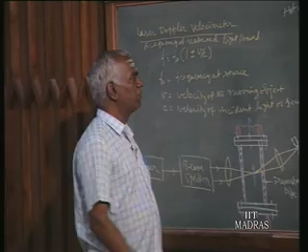Yesterday we saw the hot wire anemometers in 3 modes of operation. That is constant current mode of operation.

This is a hot wire anemometer where we have this wire here, of a few microns diameter. It is taken inside, with connections given inside. This wire is used to sense the flow.

We saw 3 modes of operation: constant current mode, constant temperature mode, and another with automatic adjustment and feedback control. This is what we saw yesterday.

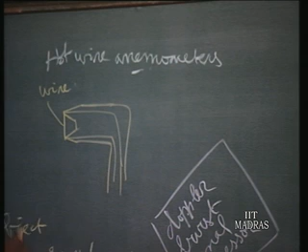In maintaining such hot wire anemometers, one is supposed to clean this wire periodically. Otherwise, the dust carried by the flue gas will get deposited, and we will find the heat transfer coefficient H affected.

We saw yesterday the equation I squared RW equals H into A into TW minus TG, the heat transfer equation. That factor H is affected if you allow dust to accumulate on the wire. So it should be cleaned periodically so that the calibration curve remains valid.

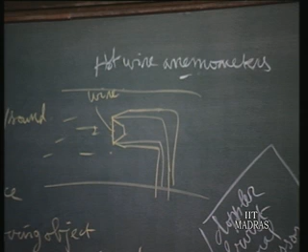We also saw the calibration curves. In cleaning it, since the wire is so thin and short in length, it may break. Also, the gas flow in the pipe may contain hard particles, and due to high velocity, when a hard particle hits the wire, it may also break.

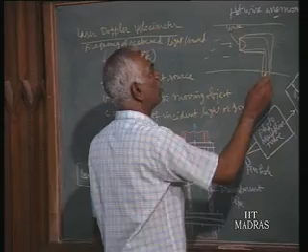So in order to avoid this problem, people nowadays use a hot film anemometer instead of a hot wire anemometer.

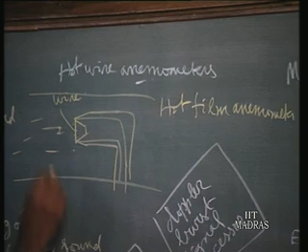Here they take a wedge type glass, made up of glass support. Instead of keeping a wire, they paste the wire material on both sides. This is a wedge type.

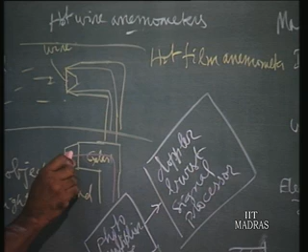They deposit the wire material on both sides of the wedge, then take a wire from the front surface, and from the back surface another wire is taken. So now it's a hot film anemometer - instead of wire, we are using a hot film, supported on the face of the glass support. This eliminates breakage, which is the advantage of the hot film anemometer over the hot wire anemometer.

So now we pass on to the next method, that is the laser Doppler velocimeter.

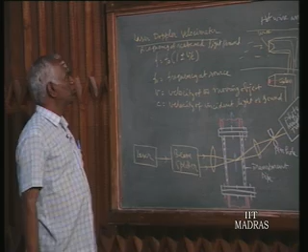Here one can use either sound or light. The principle is making use of the Doppler effect. The Doppler effect states that the scattered light from any moving body contains information about the velocity of the body, so the scattered frequency will be different from the source frequency. That is the Doppler effect - the scattered beam contains information of the velocity.

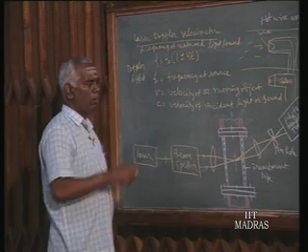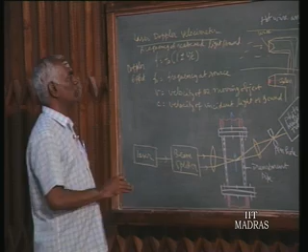This is expressed as an equation: the frequency of scattered light or sound, f, equals f0 times (1 plus or minus v by c), where f0 is the frequency at the source, v is the velocity of the moving object, and c is the velocity of the incident light or sound, whichever we use in a particular instrumentation.

We use plus when the object is moving towards the source - this is the source from where we send a beam. We use the other sign when the object is moving away from the source. For example, this Doppler effect is used for identifying racing cars.

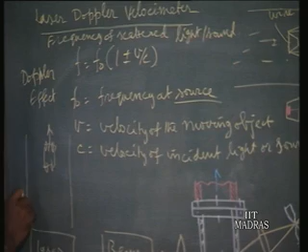Suppose a police officer is standing here, and he sends a light source or laser beam and collects it back. If the car is moving away, by collecting this reflected light or laser, he will find out the speed, whether it is more than the allowed speed on the road.

So the Doppler effect is used by traffic police officers to locate racing or overspeeding vehicles. The same principle applies here, because the moving vehicle's velocity information is obtained this way.

Similarly here, v is the velocity of the moving object. Now in any gas flow or fluid flow, that flow contains some foreign particles, and we assume that the foreign particle moves with the same velocity as the fluid. Under that situation, we send a laser beam through a beam splitter, splitting it into two, and with the help of a lens we converge it within the diameter of the pipe.

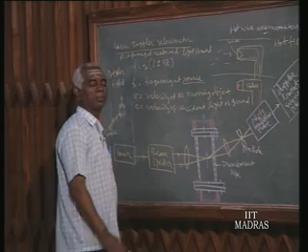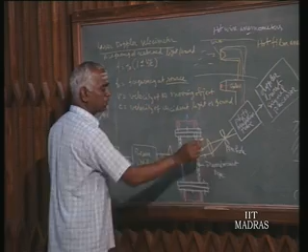Where it converges, there may be a particle flowing with the same velocity as the gas, so it scatters the light. This scattered light is collected by another objective lens, and through a pinhole we can control the intensity. Then it goes to the photomultiplier tube where the light is transduced into voltage. That voltage contains the information of the velocity of the object. Through an electronic circuit, according to this equation, you extract the information proportional to V, which is depicted as the velocity of the fluid.

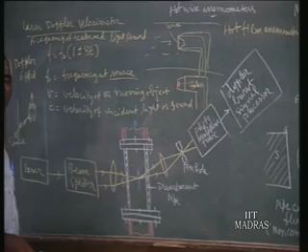That is the principle of this laser Doppler velocimeter. By focusing at different points, we can find the velocity of the fluid, then we plot that velocity profile, and the average velocity multiplied by the area gives the flow rate. That is how the laser Doppler velocimeter is made use of.

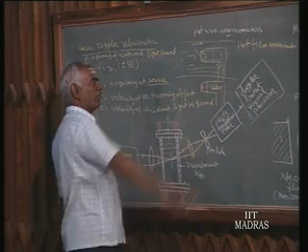It has one main difference. Now compare it with the pitot tube as well as the hot wire or hot film anemometer. There, the flow is obstructed - you have only less area available, since the total area minus the probe area is what remains. That is, the flow pattern is disturbed by inserting the pitot tube or hot wire anemometer. That is not there in the case of the laser Doppler velocimeter - it's undisturbed flow. Without disturbing the flow, we are making the measurements. That is the main advantage of this laser Doppler velocimeter.

In aeronautics laboratories, many places use this laser velocimeter to find out the velocity of air particles in a channel, in a conduit.

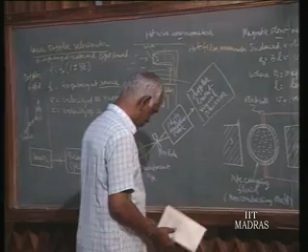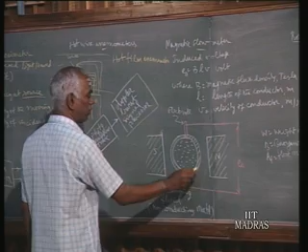Next we go to the magnetic flow meter. One such magnetic flow meter principle, the sketch is given here. This is a magnetic flow meter. It contains a pipe made up of non-conducting material, carrying the fluid. Here it can be slurries or liquid containing sediments also, because we don't have any obstructions. So slurry flow rate also can be measured using this. That is the main advantage of the magnetic flow meter.

So we have the non-conducting pipe carrying the liquid in the direction perpendicular to the board, and by two electrodes we pick up the voltage developed in this fluid, which is placed across the north pole and south pole of a permanent magnet. The magnetic lines flow in this direction - that is Faraday's principle. The magnetic lines are in one direction, the flow is perpendicular to the board, and the electrode direction is perpendicular to both. If we call this the y direction, the magnetic lines are the x direction, and the z direction is perpendicular to the board.

These represent the flow, the velocity of the conducting material. The diameter of this pipe represents the length of the conducting material. Each small strip can be considered as a strip, so it flows in this direction. The flowing direction is the z direction. Magnetic lines are in the x direction, and the voltage developed is in the y direction.

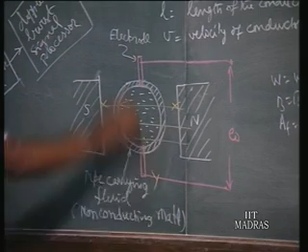So we have this equation: induced voltage EO, picked up at the electrodes, equals B into L into V, where B is the magnetic flux density in Tesla, L is the length of the conductor in meters, and V is the velocity of the conductor, that is the flowing speed, in meters per second. The problem here is it's not a conventional conductor wire, but the whole diameter is considered as the wire length, as the wire is in the form of a disk as it moves.

So the developed voltage is picked here, proportional to velocity, we have got output voltage. And the output voltage can be calibrated by sending known voltages, known velocities, and later on unknown velocities can be found out from this voltage developed between the electrodes.

Here in this case, when the liquid that flows is non-conductive, just like water, the amount of voltage developed is very, very small. If you use a DC amplifier to amplify this voltage, a drift problem will come. To avoid this, instead of a permanent magnet, they use an electromagnet of varying frequency. Then the voltage developed also will be at varying frequency, and that can be amplified suitably in an AC amplifier.

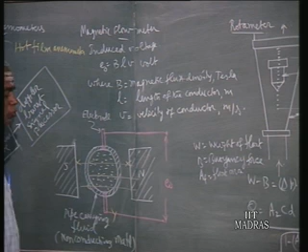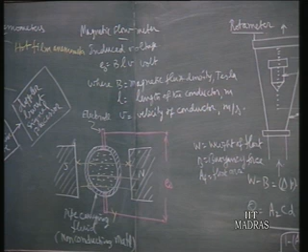Suppose it is a conductive material, just like liquid metals, then we don't require AC. DC voltage itself is sufficiently large. We can measure it by an ordinary DC voltmeter.

It is to be noted, since it is a non-conductive material, the electrode goes into the body and touches the liquid at the surface of the liquid. Then only the voltage can be picked up and it comes down. So this is the principle of the magnetic flow meter.

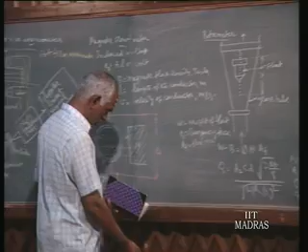Next we go to the rotameter. For small flow rates, rotameters are used, both for liquid and gas, but mainly people use it for liquid flows.

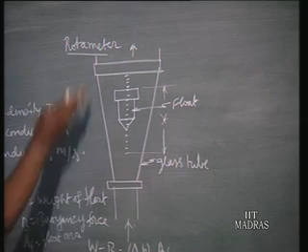The method of functioning is, due to flow, the float rises. When flow is there, it rises to different heights at different flow rates. Where it stops, a measurement is taken, that scale is written there, and that scale reading you can calibrate in terms of flow rate. This is the way it is made use of.

The principle of functioning is, assuming the float is at some height, let W be the weight of the float, and buoyancy force equal to the volume of the float times the specific weight of the liquid that flows, that is the buoyancy force. That is, weight minus buoyancy force is balanced by delta P, the pressure drop across the float, into AF, the projected area of the float, giving the net balancing force.

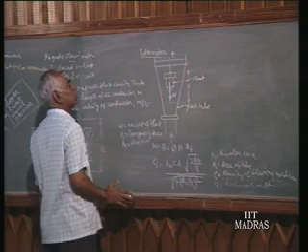The remaining weight is taken up by delta P times AF. That is the equation for equilibrium. Now you find for any given float or any liquid, W is constant, B is constant, AF is constant for any given float and given liquid. So when everything is constant, then delta P should be constant.

But at the same time, we find the equation for flow rate, Q, the flow rate through this rotameter, is given by A2, the annular space. CD is the coefficient of discharge.

Delta P is the pressure drop across the float. Rho is the mass density of the flowing medium. And A2 is the annular space. A1 is the pipe inlet area.

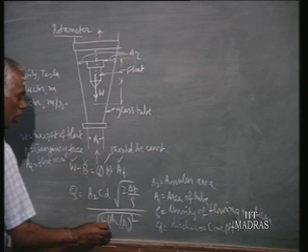So in this, if delta P is to be constant, then whenever Q varies, considering A2 by A1 too small, we can neglect it, and Cd is a constant. So you find Q is proportional to A2. Since delta P should be constant, when Q varies, A2 has to vary. That is the reason for different flow rates, it rises so that a larger area is there for the flow.

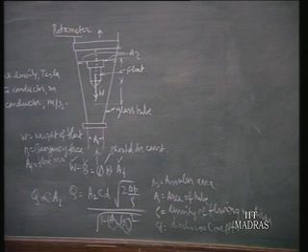So as it rises, the area is increased at a linear rate, as the float rises, in a linear relation. This linear relation is obtained by some parabolic curve, because if it is conical, you will find the area is no more proportionate to the lift. So some parabolic, quadratic function profile is needed, such that area is proportional to the lift.

So you find Q is proportional to lift also. That is why we get a linear scale indicating the flow rate. So that is the way the rotameter functions, it gives a linear scale. As the flow changes, we measure the height and so on.

Depending upon the different densities of the fluid liquid, the manufacturer gives different shapes for the float. Accordingly, we have to use it, as given by the manufacturer.

Before we pass on to level measurement, we see one more method for flow measurement, called the turbine flow meter. This is domestically used in almost all houses where water consumption is to be charged. Normally people go for such type of turbine type flow meter.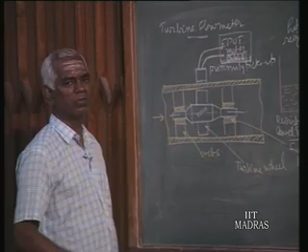It's a turbine type flow meter. In the pipeline, you insert one turbine. Here it is shown, this turbine wheel with bearing and webs. These webs, probably three, are radially and diametrically shown schematically here. 3 or 4 webs may be there, and the liquid will be flowing between the webs, but the bearing is continuous, so it's a cylindrical piece. That's how it is mounted.

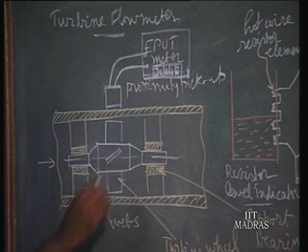So you have got the turbine wheel blade made up of magnetic material. Yeah, magnetic material.

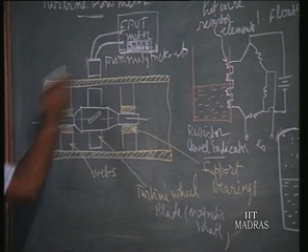So whenever a blade comes near, this proximity pickup can be positioned outside the pipe carrying the liquid or water, and whenever a blade comes, this proximity pickup will give one pulse.

Such pulses are counted in an EPUT meter, events per unit time, per second, per minute or per hour. You can select so many pulses per second.

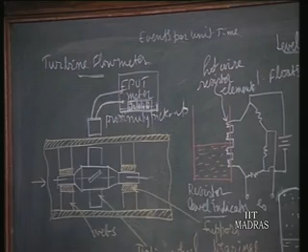That is actually proportional to the flow rate. The counting rate, the pulse rate, is proportional to the flow rate.

When we want to find out the total flow in a given duration, you start the flow, and at the end of the duration, the total reading or total pulses represents the total flow. Total number of pulses represents total flow, and the pulse rate per second, per minute or per hour represents the flow rate per second, per minute and per hour respectively.

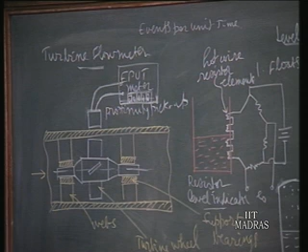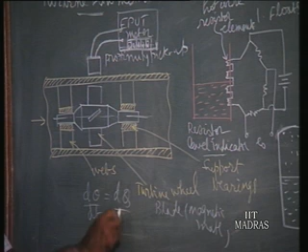That is the principle. Whenever it rotates to that extent, if d theta is the angular rotation, that represents a small differential flow dq. Then d theta by dt is the same as dq by dt, that is the counting rate. The pulse rate d theta by dt is given by the pulse rate. So this is the principle.

If you don't have this proximity pickup, you can also go for a purely mechanical counter. Suppose this is a rod extended, you can connect a set of bevel gears and bring it out with a suitable sealing, and let it be counted here. This is the mechanical counter, a bevel gear unit connected to the axis of the turbine.

The moment the rotation is brought outside by a set of bevel gears, the second bevel gear axis is connected to a mechanical counter. So here you can take the reading.

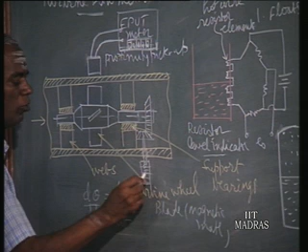This is what is used normally in houses. You will have the mechanical counter. The person will come and take one reading at the beginning of the month, and one reading at the end of the month. The difference between the two readings represents so many liters or so many gallons per month. So that is how it is used for making total flow or flow rate measurements.

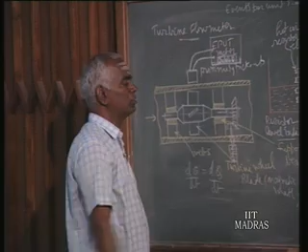So here, if you find out the rotating speed, then from the counter we can also find out the flow rate. So this closes the flow measurements. Next we pass on to the last chapter in our topic, mechanical measurement, that is level measurement.

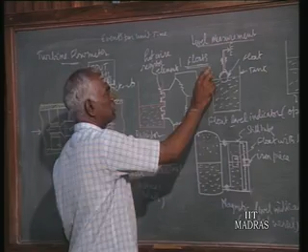The first and foremost method is using floats. Floats are often used to sense the level of a liquid. Also, in almost all houses we have water tanks, and the water in the water tank is invariably sensed by having a float there. If the level is full, this motion of the float is made use of to close the valve, through linkages.

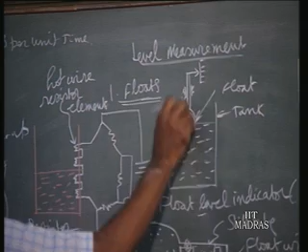Suppose you want an electrical signal, or if you want to just make a reading, you have a scale. The float end is connected to an extension rod, and that rod end moves over a scale, so you can make readings of how many meters height of water is there. Or you can also connect it to a resistance potentiometer, convert this level into a suitable electrical signal, and process it.

You can take it to a control room. In process industries, the tank may be some distance inside the factory, and that signal is brought to the control room, where the operator knows at any instant what is the level in that particular tank.

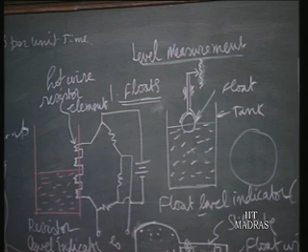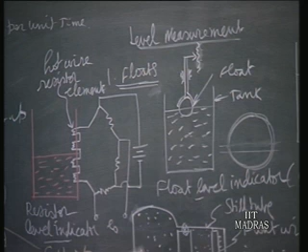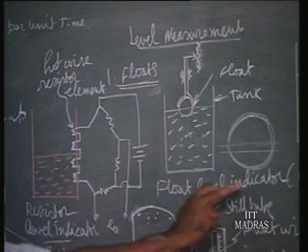So float is the convenient mechanism. It is a hollow plastic sphere. So when it immerses, its weight is very small, and even small immersion is sufficient to support this weight. Any further rise will push this float up. If it is of sufficiently big dimension, you find a lot of force is there. That force is more than sufficient to actuate a valve and close the water inlet into the tank in case the tank is full. That is a very convenient mechanism. More or less, in open vessels we use these types of floats.

Suppose we have a closed vessel, just like a boiler for steam engines or in power plants. If you don't have free surface to atmosphere like this, we find immediately above the liquid level you have steam at very high pressures. In such situations this type of float is not useful, but if it is medium pressure we can go for a sight glass.

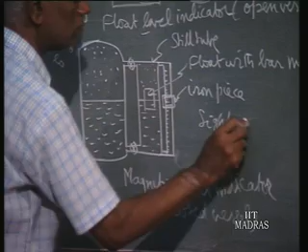We can connect a glass tube to the tank so that the water level can be seen from outside. It is only for low and medium pressure of this vapor. If it is high pressure, then glass may not withstand.

Then we go for a metallic tube connected to this main tank. It's called a still tube, made up of metal. Then we don't see the level since it's opaque.

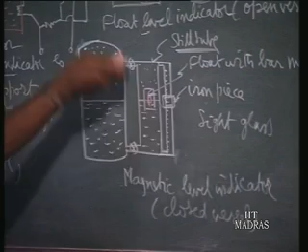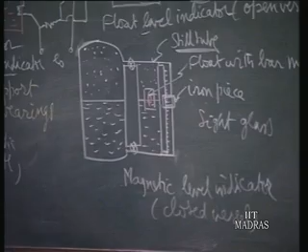Then we make use of a float with a bar magnet. Some bar magnet will be part of the float. So as the float rises, the bar magnet also rises along with it, and nearby we have an iron piece guided by a round piece where a scale is marked. So as the float rises, the magnet pulls the iron piece to indicate the level. Wherever the float is, the magnet attracts the iron piece and adjusts this level. As the float rises and falls, the iron piece also goes up and down along with the magnet. So from outside we can see where the iron piece is, and that is the level of the liquid. This is how in closed vessels the level is sensed or seen from outside.

Another method is by using buoyancy force. Suppose we have a cylindrical member, and there is no liquid in the tank; then the load cell will give the total weight. It can be hollow and made of any metal, a metallic hollow cylinder. So the cylinder weight will be indicated by this load cell, and we mark it as zero level because full force is there. But as the level increases, the immersed volume times the specific weight of the liquid is the buoyancy force. So if W is the weight of the cylinder, W minus buoyancy force will be the load cell reading, X0. That will be calibrated having known levels. Later on, unknown levels can be read from the load cell.

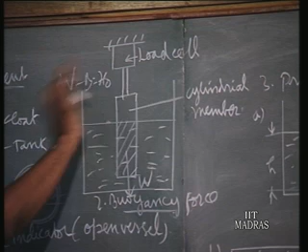So load cell reading can be calibrated in terms of the level here, because buoyancy force is a function of level. So X0 will be a function of level, where W is a constant. That is how we use the buoyancy force to sense the level.

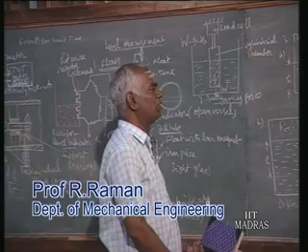Then we know that when there is a liquid column, the pressure at the bottom is a function of the column weight. This is a well-known principle. By using that, we have designs based on pressure sensing in different ways. Under different situations, we can also sense the level of the liquid. One way is at the bottom of the vessel, we connect a pressure gauge. The pressure indicated is a function of height and the specific weight of the liquid, W into height. So for a given liquid, W is constant, so P is proportional to height.

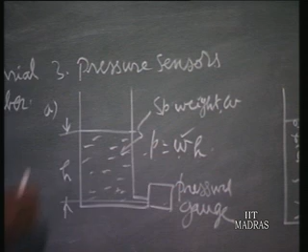So the reading in the pressure gauge is calibrated in terms of the height of the column of liquid in the tank. This is the obvious method, and this is again for an open vessel.

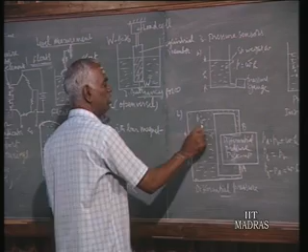In a closed vessel, we go for the differential pressure pickup. We have the vapor also of the liquid above the liquid. So the vapor pressure is taken as one of the input pressures to the differential pressure pickup, and the bottom point, as near the bottom as possible, we call point A. So total pressure at A, that is PA, equals liquid column plus vapor pressure.

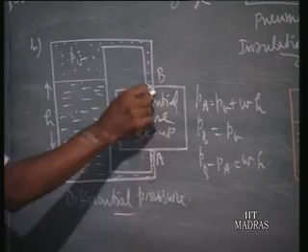So PA is equal to PV, vapor pressure, plus W into H, where W is the specific weight of the liquid. Whereas at point B, vapor pressure will also be there. So PA minus PB, that is the reading proportionate to the differential pressure gauge, is equal to WH, since the vapor pressure terms cancel. PA is larger, so PA minus PB equals WH, where W is constant for any given liquid at a given temperature.

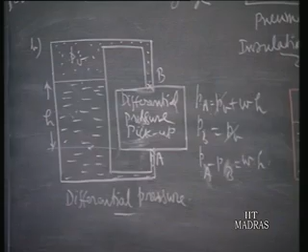So PA minus PB is proportional to H. So the reading of the differential pressure pickup will be in terms of the height, and later on we can use the reading for any unknown height. This is the second way of using the pressure reading.

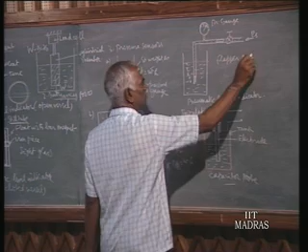The third way is using the pneumatic principle, that is what we call the flapper nozzle system. I once explained this earlier, the flapper nozzle system. It consists of two nozzles. This is one nozzle here.

We will call this the nozzle at the tip. And this is another nozzle, the fixed one, which we will call the fixed nozzle.

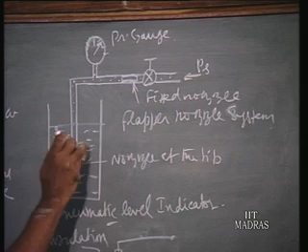As per the flapper nozzle system or principle, the pressure in between the two nozzles, we call it the chamber. The space between the two nozzles is called the chamber. The chamber pressure depends upon the resistance to flow at the nozzle at the tip. That is the principle, an application of the flapper nozzle system.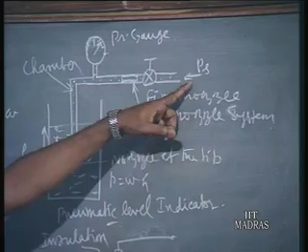So at this point, whatever the pressure is, if h is the height, then pressure P is equal to W into h. That is the pressure. If the chamber pressure is just above the liquid pressure at this tip, then the gas will escape in terms of bubbles. So until you note bubbles, adjust the supply pressure with the valve, just rotate it.

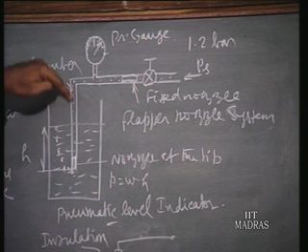So higher and higher pressure will be allowed, and the pressure in the chamber, through the fixed nozzle, will build up. The gas, or air, pneumatic air we can use, preferably at 1.2 bar pressure gauge, can be adjusted so that different pressures are allowed, and when the pressure builds to the extent of the pressure due to this column, then it will start.

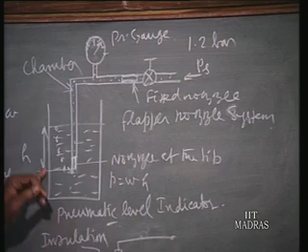Just at that time, stop adjusting it and note down the chamber pressure in the pressure gauge, and you can calibrate it in terms of the known height. Later on, any unknown height can be read on this scale. So the pressure gauge will be calibrated in terms of the height of the liquid above the nozzle at the tip.

So these are the three ways in which pressure, the pressure of the liquid column, can be made use of to sense the level of the liquid. The other method is the capacitor.

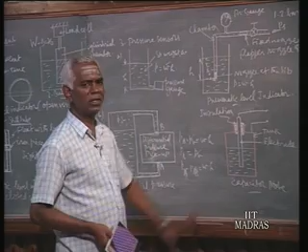Any liquid, solid, or powder material will have its own dielectric constant. It is called the dielectric constant.

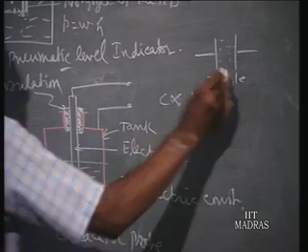So we know in a capacitor, capacitance is proportional to the area of the two parallel plates and the dielectric constant of the material, divided by d, which is the distance between the plates. We know capacitance is a function of all these things. Now here the area and the distance are both constants.

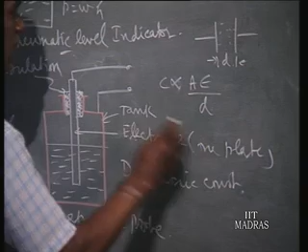The electrode is one plate, and the tank is the second plate of the capacitor. Now when the charge, or the liquid, or whatever the level, powder or liquid, is increasing, then the dielectric constant is varied.

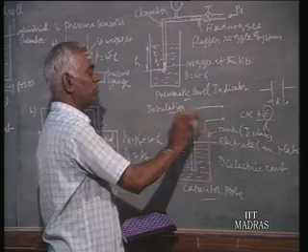This is what is varied. In the two plates, the dielectric medium level is changed. Hence you find the dielectric constant for that capacitor made up of this electrode and tank will change, and this will form one capacitor in a simple electronic or electrical circuit, and proportionately you can get a signal output from the circuit. So as the level changes, epsilon changes, capacitance changes, then the voltage output in the electric circuit will change, and from that we can get a signal proportional to the level.

So to insulate these two plates, we have got this insulation. This is one plate, this is another plate, and in between you should do insulation, so we have got an insulator. In case the liquid also contains a conducting material, like metal powder, then extend this insulation for the full length of the electrode.

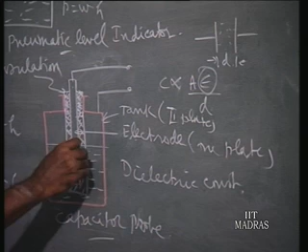If it is a non-conductive material, it is sufficient to insulate only at the top where the electrode and the tank are joined. But if the material stored, whether liquid, gas, or metallic powder, is conducting, then extend this insulation throughout the electrode. Then you will again have variation as per the level, the dielectric constant will vary, and you will get the signal. That is the capacitor principle for level measurement of the charge inside the tank.

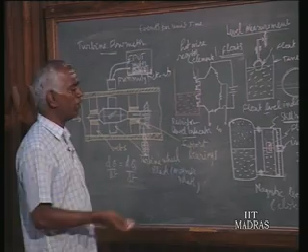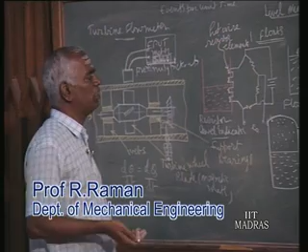The last method shown here is by using hot wire resistor elements. This is mainly used for cryogenic fuel. Suppose in a rocket, at the time of manufacturing itself, we will have the tank to store the liquid fuel, and in filling the liquid fuel in the tank, we should be noting at different stages of the filling what is the level in the tank.

So as the liquid level increases, for example at this level 2 resistances are immersed in the liquid, especially in cryogenic situations, the moment any element is immersed - previously we will say it is switched on - current is flowing through all the resistances embedded, which will form one of the arms of a 4-arm bridge or Wheatstone bridge. So before filling up, we find current is flowing through all these resistor elements.

They will attain a certain temperature due to current flow. As soon as any element is immersed, the heat transfer coefficient of that element will drastically increase, and thereby a lot of heat will be given to this cryogenic liquid, and that element's resistance will come down. That means if previously you had balanced it with no liquid, at the moment one element is immersed, immediately the balance is affected to that extent, and you will have an output voltage.

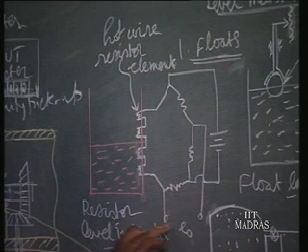Similarly, as the number of elements immersed increases, the effect will be multiplied approximately - if you assume a linear relation, then the output voltage will be proportional to the number of elements immersed. So you can calibrate that reading in terms of the level of filling up of the liquid fuel. That level you can always get in terms of the output voltage or imbalance voltage of the bridge.

This is one of the arms. So if you call it R1, R2, R3, R4, across 2 terminals you apply the power supply, and the other 2 terminals you take the output. This is a typical 4-arm bridge circuit - the hot wire resistance element.

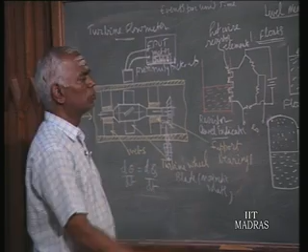These are the few methods used for level measurements. Though there are many other methods, these are the conventional ones found. So with this, I come to the close of the whole subject of mechanical measurements. Thank you.